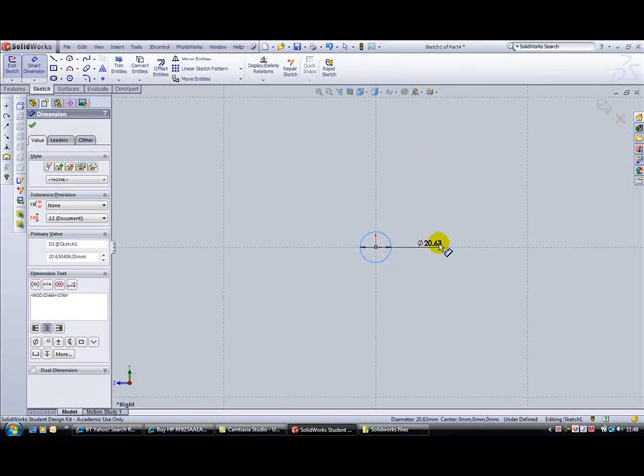Right, the next component is the nut that goes on the opposite end of the bolt to the cam lever. We're going to start drawing on the right plane, and we're going to draw a circle of 16 millimeters. Smart dimension, type 16. Zoom in a bit. Spacebar isometric, and we want to exit the sketch and extrude that sketch out for a distance of 5 millimeters.

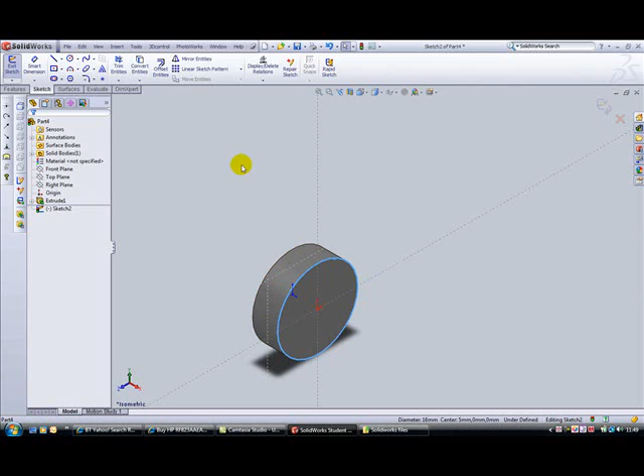We then want to sketch on this front face, highlight the edge of the tool, and what we're going to do is convert that entity, the edge of that disc, onto our new sketch. So convert entities, exit the sketch. Now what we're going to do is do an extruded base boss again. This time it's going to be for 10 millimeters, and we're going to put a draft angle on of 12 degrees. As you can see, it just puts the slopey side on there. Click to exit the extrusion.

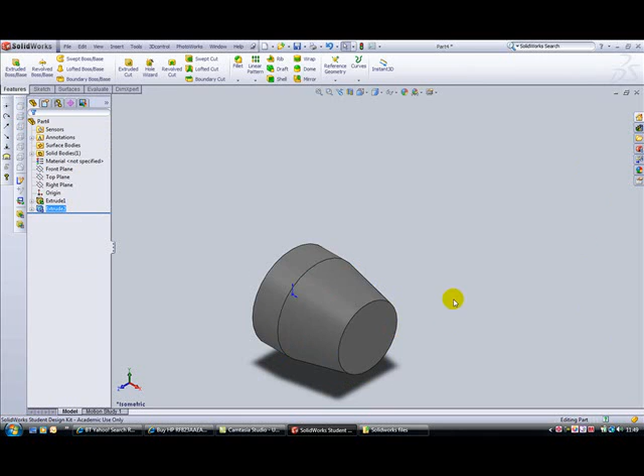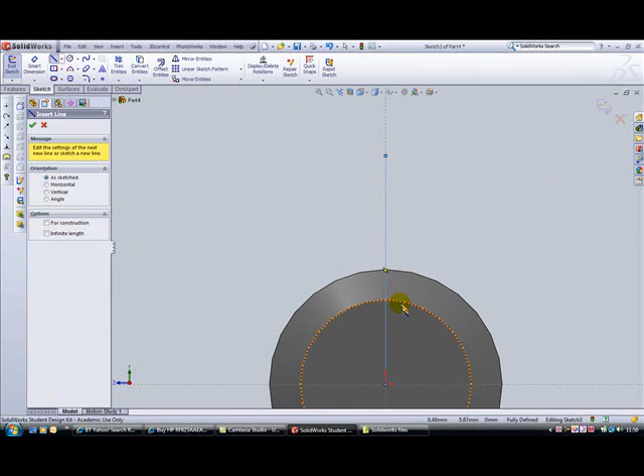Now what we want to do is cut like a V groove in the top here, so I'm going to draw from this face, sketch on there, spacebar, normal to, and we're going to put a construction line, a centre line from the middle of the origin straight up the drawing face. Okay. Then we're going to use the line tool from this edge, that's front face, to where it crosses the construction line. And we're going to put an angle in here of 80 degrees. Use the Smart Dimension tool, click on this line and this line, change the angle to 80 degrees.

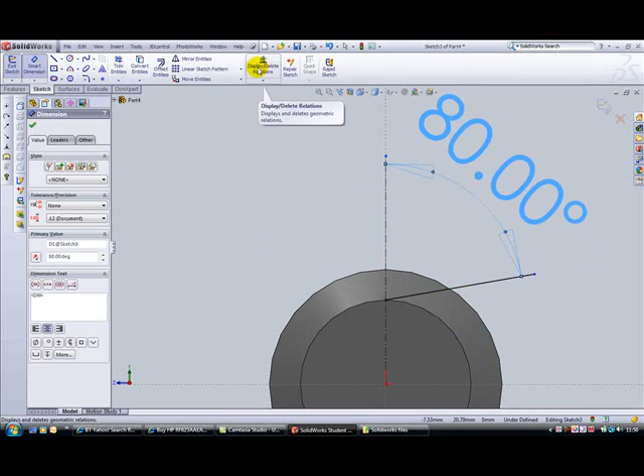Next thing we're going to do is mirror this line over to this side of the construction line. So if we go to Mirror Entities, click on the line we want to mirror, tell it where the mirror that we want to use is, and as you can see you get a preview of the line. Click on the tick to accept it. Exit the sketch, spacebar and isometric.

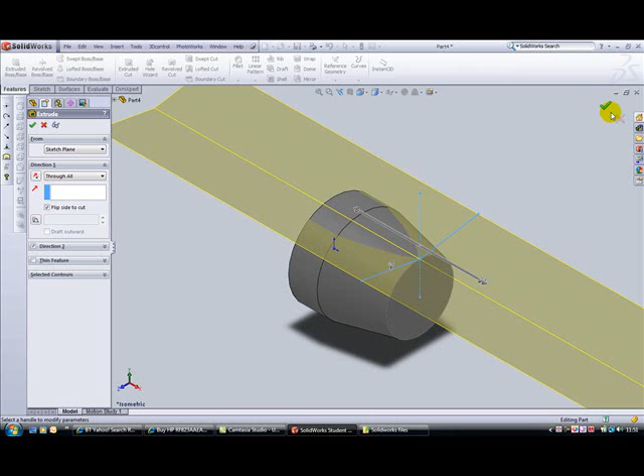Now we're going to use this sketch to do an extruded cut through our part. So it's going to go through all, and we're going to make sure that we cut the top side. So click on the arrow to change the direction, click to accept the feature, and there's our cut groove out the top. Next thing we need to do is pattern this around the outside of the nut.

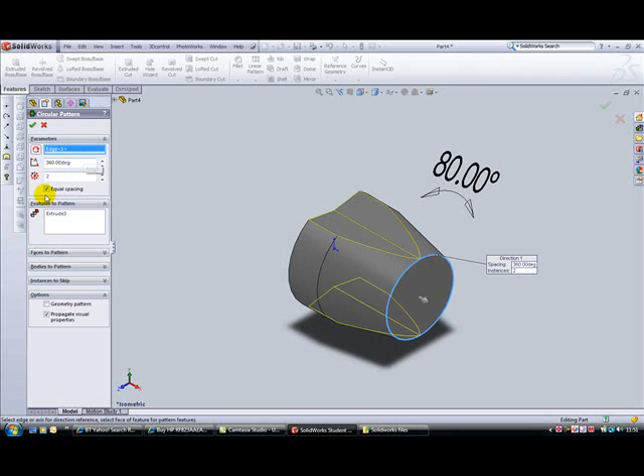So we're going to do a circular pattern. We want to tell it what we want to rotate our cut around, or our pattern around. We'll use this edge. We want to go all the way around the outside. We want equal spacing, and we want 3 of them. Click on the feature to accept it, and then we should be able to move our model around to see that those 3 are there. Press the spacebar and isometric.

Okay, next thing we're going to do is put a hole down through the middle of here. Now it's not just going to be a blank hole, it's going to be a hole that's got a thread in it. So we're going to use the hole wizard this time. Click on the hole wizard, and then just work our way down the menu. So the hole type is a tapped hole. It is going to use the ISO standard. There are all these other ones you could pick from, but we're going to use the ISO. It's a tapped hole. We're going to use an M5 thread. The hole is going to go through all. The thread is going to go through all. Okay, that seems to be okay.

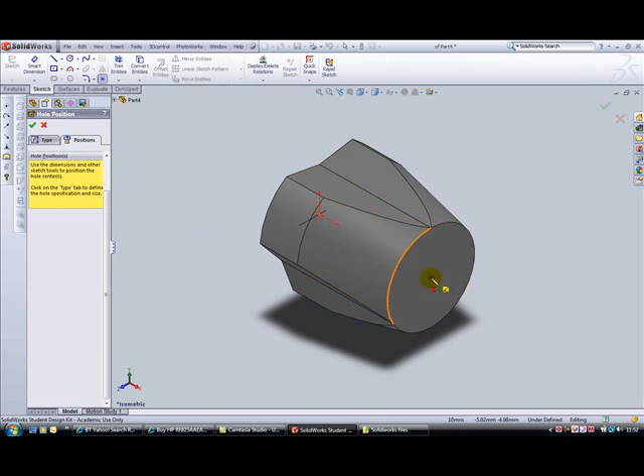Now we're going to position the hole. So we're going to put it onto this surface so that it is coincident with that point, which is the middle of the circle. Click, and that should give us our hole. There we go. Right, move it round, and that's the component almost complete. There's just a little groove to cut around the outside of here. So press the spacebar and isometric.

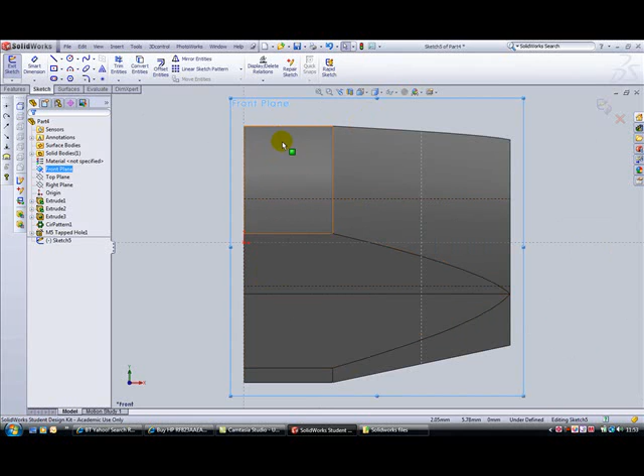Now we're going to use the front plane. I'm going to sketch on that plane. Press the spacebar and normal to. And we actually want to find out where the bottom of this groove is in the one that sits in the top here. So we're going to make our model so it's a wireframe. And let's just have a quick twizzle this round. That's right. And it's that line there that we want.

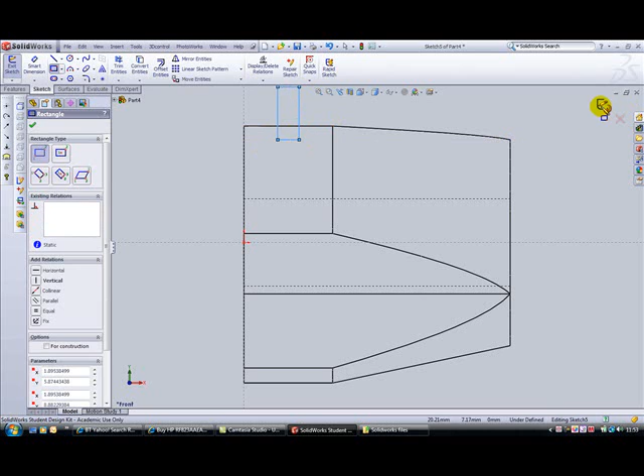So, next thing, we need to draw a rectangle so it's linked to the bottom of that hole. That's the wrong one. Delete that. And we want to use the rectangle tool which allows us to join corner to corner. So we can link it to this line and draw a tall rectangle this way. It wants to be about the middle. If you want to put some measurements on, you can do it, but about the middle will do. Exit the sketch, and we can change our drawing back to a rendered model.

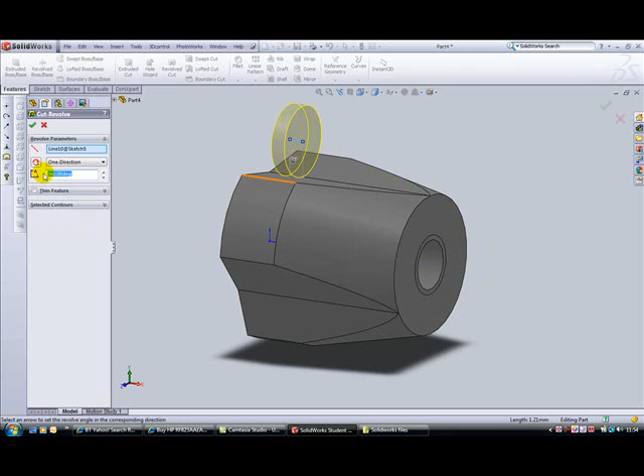Now what we need to do is put an axis for our rotation down the middle of here. So we need to go to Insert, Reference Geometry, Axis, and we're going to select that surface there. The yellow line is the axis of rotation. Click to exit. Now we're going to do a revolved cut. So revolved cut, we're going to use this sketch, but we're going to use this axis for our rotational cut. That's the sketch we're going to use, and you'll see we've got a preview. Now we can have a twizzle around of the model so we can have a look, make sure everything's okay. That looks to be fine.

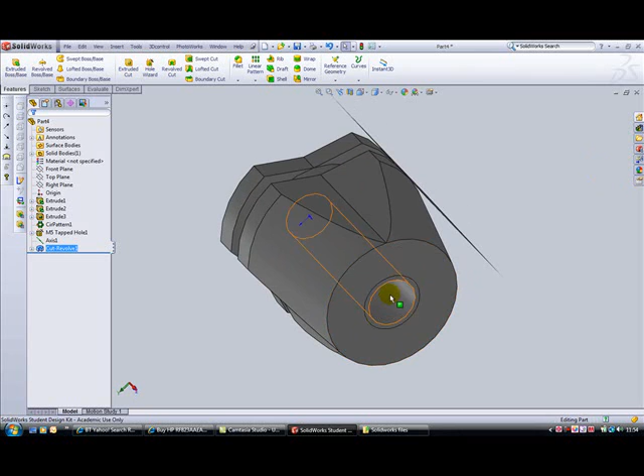You see there's no thread down the middle of the hole. That's because what the program uses is something called a cosmetic thread, which is basically a line around the outside just to indicate there's a thread there. It saves on computer memory so that your model doesn't take time being redrawn. Okay, isometric, file, save. Save this one as nut. And that's the second component finished.